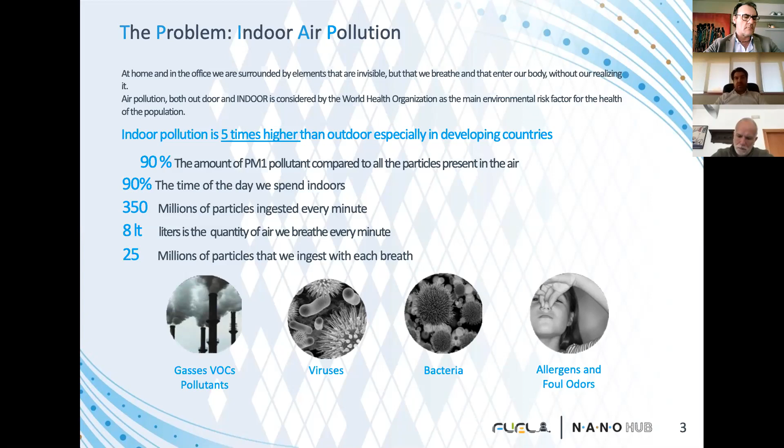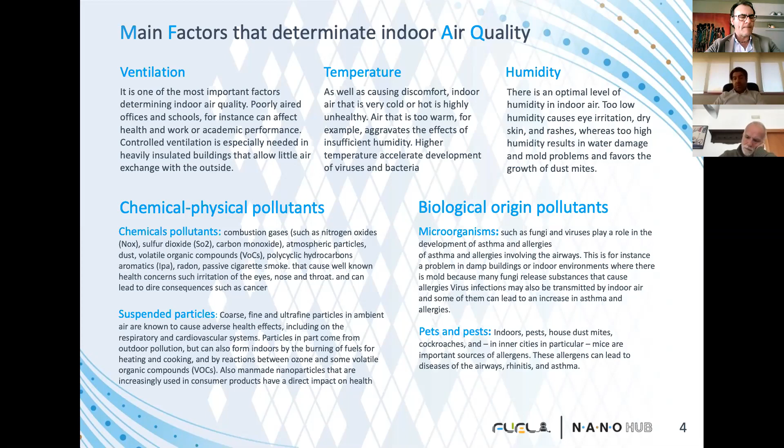Why is the quality of indoor air poorer than outside? Because of poor ventilation systems, because of temperature and humidity creating colonies of bacteria and viruses, and because of the presence of chemical substances called VOCs, like toluene, acetaldehyde, formaldehyde, as well as virus and bacteria present in the environment. So we really have to take care about indoor quality.

I mentioned that last year, when we faced the issue of sanitizing the air inside vehicles—bus, train, tram, airplane, or cruise boat—we tried to analyze all the different technologies available, which today we're learning more about due to the pandemic. But we discarded all of them because we had in mind two main parameters.

The first was the possibility to work continuously, 24 hours, with people inside the vehicle. The second was finding a solution that, considering the life cycle cost—not just the cost of the single product, but the entire life including maintenance, refills, and everything—could keep costs at a decent level. This is a typical approach for train producers: when designing interiors for the train business, we must consider not just the cost of the product, but the life of the train itself.

And following those two parameters, most of the technologies were not suitable. If you're thinking about ozone, peroxide, or UVC light, they are not suitable with people present. We cannot use them while people are inside a vehicle or environment because they are toxic for us. In some cases, like UVC, they can create huge cancer-related damage to our skin and eyes.

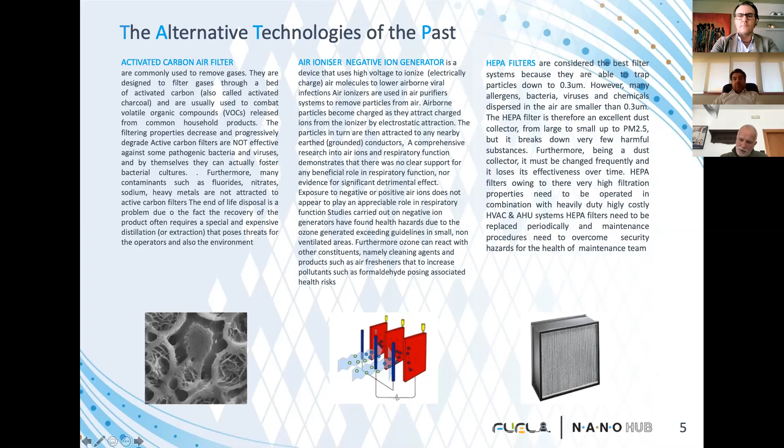Please feel free to interrupt me if something is not clear, or if you have any kind of question from that point of view. Is it okay till now? My side is perfect. Okay. Very clear. Thanks. Yeah, I think we have some questions, but we'll probably save those till the end.

Okay, thanks. Then, for all these reasons, as I said, we didn't consider these technologies already 2 years ago. And we landed on photocatalytic technology because we found out that it was fulfilling the two parameters that I mentioned: able to work 24 hours with the people in the environment, with a total life cost lower than any other type of technology. But speaking about photocatalytic, here again another world opens, in the sense that thanks to NanoHub, we found out that a possibility was to use the trioxide of tungsten, the photocatalytic coating that we use, instead of the most traditional TiO2, dioxide of titanium, that you find also in several competitors' products.

Photocatalytic technology is well known, in the sense that it's not just an invention of today because of the pandemic. It's been on the market for over 20, 30 years. There are rumors that it was also used by NASA for the space shuttle, but in that case it was mainly used to decontaminate the environment. But anyhow, it means that it's a proven and well-known technology. But I repeat, till 3-4 years ago, the only catalytic element that was used was TiO2.

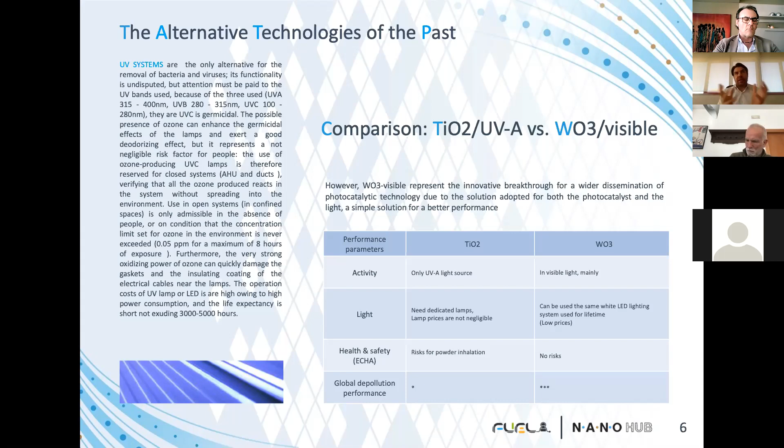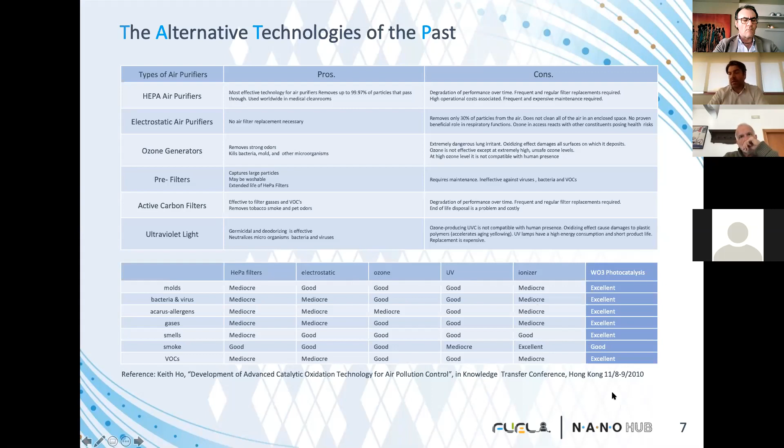Just concerning smoke, ionizers are considered better than photocatalytic, and this is also known. But for all the others, as you can see, in some cases there is not even a comparison with HEPA filters, electrostatic filtration, ozone, UV, and ionizers. And I repeat, it's not my comment, it's a study done already in 2010.

How it works, just briefly. We are saying that it's like photosynthesis.

This meeting has been a great, okay, sorry, I received a message.

How it works is a natural process. Energy, which in our case is light, is reaching a surface coated with tungsten trioxide that in 1 billionth of a second becomes excited and is creating electrons and a negative valence area. It is creating, let me say, an area of about 2 millimeters where it is accelerating the oxidation process already present in the environment.

So it's just an accelerator of the oxidation process, and in fact it is producing what are called ROS, free radicals. These are the ones that are attacking and destroying at the molecular level, or if we are speaking about viruses at the protein and RNA level, the pathogens that are present in the fluid.

I'm underlining fluid because the technology is proven to be effective not just in the air, but also and mainly in liquid as well. So we are also making some applications in water treatment to kill the Legionella bacteria, for example.

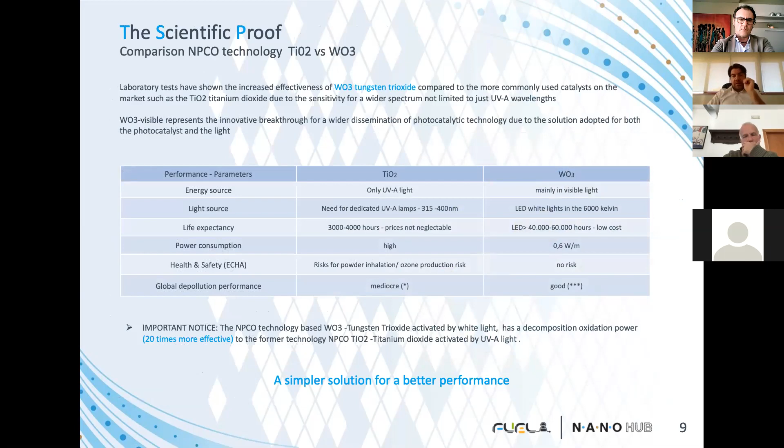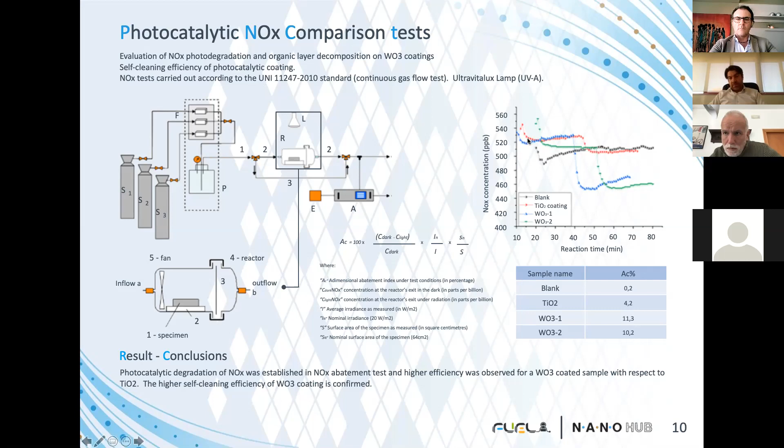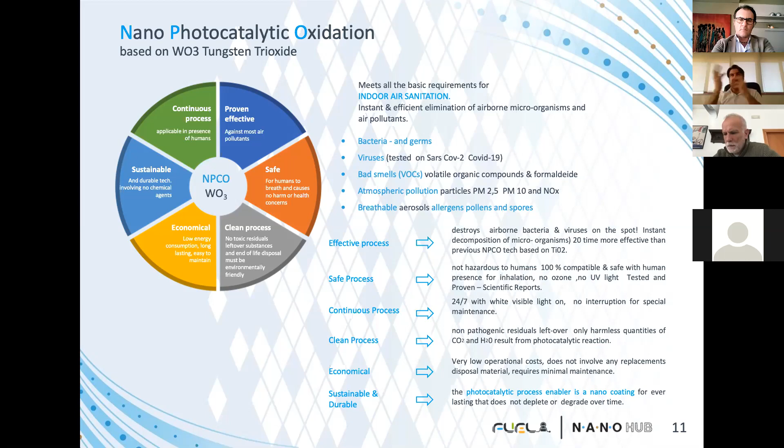But also in the next slide, here is just a commercial, the 6 reasons why we have chosen the photocatalytic in the end. It's proven effective, it's safe, it's a clean process, it's economic, it's sustainable, and it's continuous in the presence of people. And you see here what you already know, that we are the only ones that have really tested the technology specifically on SARS-CoV-2 and not just generically on the coronavirus or on a bacteria with a similar behavior or something like that.

And when we arrived in March, we understood that this was not enough to give a proper answer to the pandemic situation that we were living. And from that understanding, we went on to develop with NanoHub what is now called the KTV filter, the filter that equips all the devices, kill the virus, KTV, and that has been tested at the San Raffaele Hospital before summer, specifically on SARS-CoV-2, and it has been proven that within 10 minutes, 98.2% of the virus was deactivated, and it was 100% deactivated within 30 minutes.

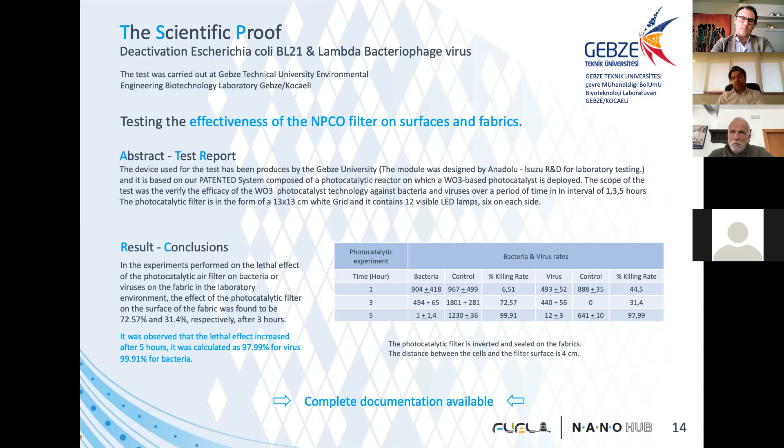Till now I have spoken about health issues related to the virus and COVID-19. But since we started before the pandemic, we were looking at the quality of the air in general. And in this specific slide, you see a study that has been done here in Varese with the University of Insubria by a professor, Mr. Macchi, who is also the president of the rhinologists in Italy.

What they analyzed was the health of the drivers. Why drivers? Because drivers are the people that are passing most of their day inside a vehicle in a traffic jam. So they are breathing pollution, and they are breathing poor quality air, because it's recycled continuously by the ventilation system.

When we are speaking about drivers, we are speaking about people that are passing more than 40–50% of their time inside a vehicle. So it can be a taxi driver, a policeman, commercial agents. So people that are almost living in the car. Breathing this low quality air, they are subject to inflammation of the cells of the nose that are at the end responsible for rhinitis, for the allergic situation.

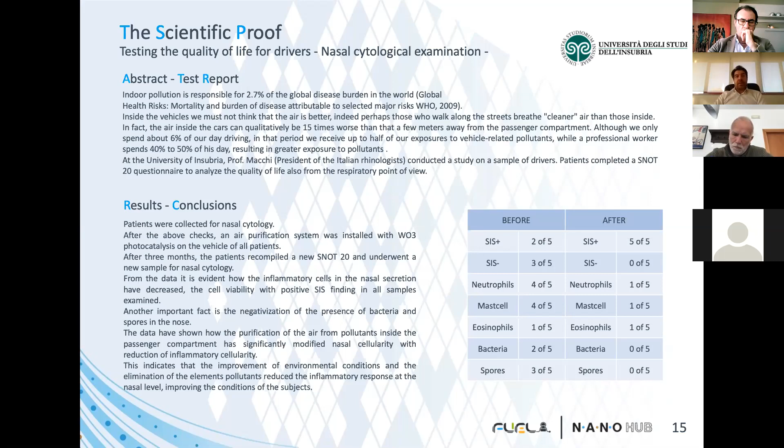Going to another field, not health in this case, but business, we just finished some tests proving that the technology is effective against ethylene. Ethylene is a natural element, not dangerous for us, produced by fruit and vegetables, and it is responsible for the aging of fruit and vegetables. And this is a big issue for supermarkets, for fruit and vegetable storage, because for them it's a nightmare when the fruit and vegetables

become old. So the technology is simply killing the ethylene, and is able to let fruit and vegetables, for example a kiwi, survive for 2 more weeks at 18 degrees. So it means not just that the fruit lives longer, but also that you can use a higher temperature, so you will consume less energy. Normally a frigo cell works at 4 degrees Celsius, so you can increase the temperature, consuming less.

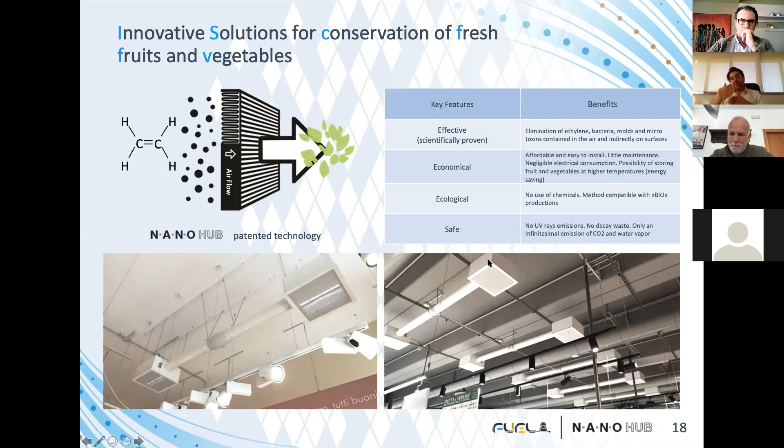How it works: you see a real installation done in a chain in Italy called Famila, but we have also done it in NaturaSì, and we are doing it now at the Gigante chain. On one side, this cube on the roof of the supermarket is sucking the air, sanitizing it from ethylene, passing it through the pipe where there is a fan, and injecting it again into the environment without the ethylene. You can understand how fast the ROI, the return on investment, can be using this technology in this kind of situation.

In March, as Ellamp per Fuel, we were at a crossroads. Our traditional business was suffering a lot in volumes, production, from the buses and train point of view. But we decided to put our expertise on the table, designing and producing for NanoHub this range of 12 products that today are in fact 13, and there is a new one now in prototyping for elevators that is coming soon. All of them are based on the KTV filter, so all of them have the same effectiveness that I just tried to explain.

And the main differences are related to where to use them and the functions that each of them has. You also find here on the bottom right another logo beside the CE certification for electromagnetic and electric risk that we have for all the devices. This is also SIMA verified. SIMA is the Società Italiana di Medicina Ambientale.

This is the Italian Association for the Medical Environment, a no-profit organization recognized by world organizations and institutions. They checked with San Raffaele the effectiveness of our technology and gave us this certification as SIMA verified.

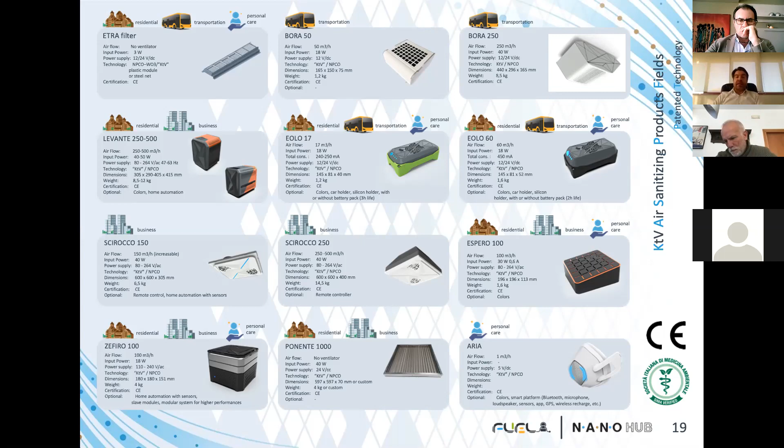Sorry - no, I can explain thanks to this slide, sorry.

This is the ETRA, the one for the bus. This is the air grid - you open it, you fit our filter, and you close it, and you won't see anything. In the scope of supply, there is the filter coated with tungsten trioxide, an aluminum frame used to fix the filter to the body of the bus, and LED strips. There is also what is written here as a dust filter.

When speaking about the dust filter, think of the dust filter in your kitchen, the one above the oven. It's simply recommended to keep the surface of the photocatalytic filter clean from dust. It's not part of the sanitizing process - it's not killing viruses, it's not filtering VOCs. It's simply blocking the dust.

In the bus, for example, this is a normal component already inside the air grid. Why? Because I told you it's a coating, a surface coating that we put on the filter, and the light energy has to reach the surface. So if the surface is completely covered by dust, the process will not be activated. That's simply why it's needed.

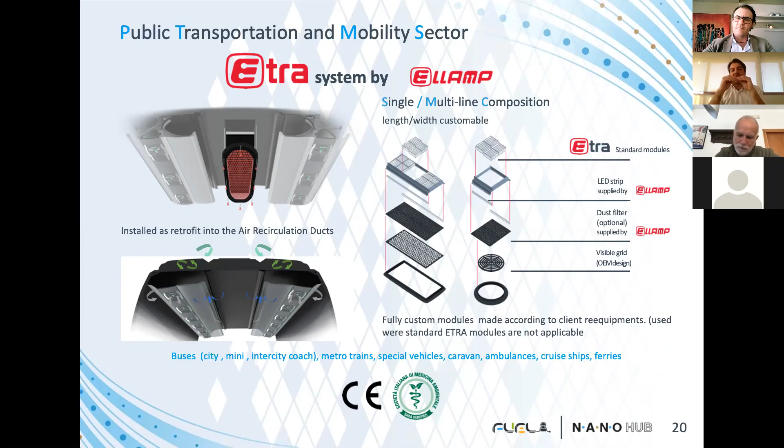So using photocatalytic coating, you will not see this kind of issue anymore. So when I'm speaking about having to clean the filter, take also into consideration that at the end it's also a self-cleaning surface.

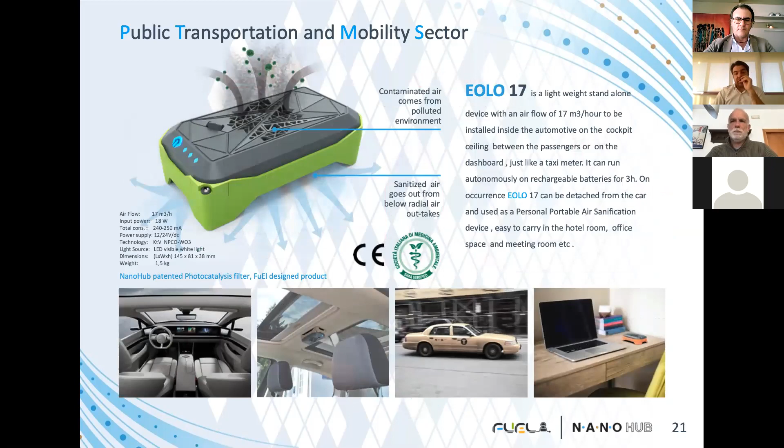This is another product, the Eolo. Eolo 17 and Eolo 60 are at the end part of the same family. Compared to the Bora 50 that I mentioned, the dimension of these components is 7 centimeters per 14 centimeters, with a height of 50.

The difference is that this one is equipped with a battery pack that allows you to use the device also when it's not connected to power. So while you are inside a taxi, a car, a van, an ambulance, a driver cab, it will be connected to electricity, 24 or 12 volts. But then when you stop your car, you can bring it with you to your hotel room, onto your desk, you can carry it with you like a gadget.

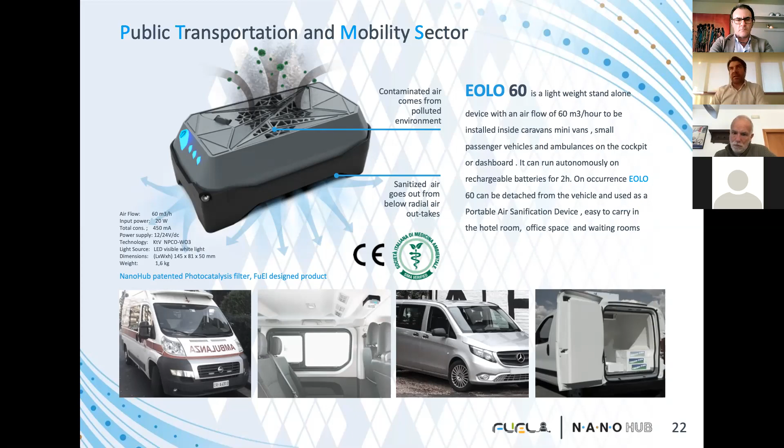It also has control of the speed of the fan, something that the Bora 50 does not have, and it's made out of metal. The case is metal, so it's suitable mainly for fleets. So you have a fleet of buses, you want to keep the device inside the buses without worrying it will be damaged, so this kind of device is more suitable, and that is that one.

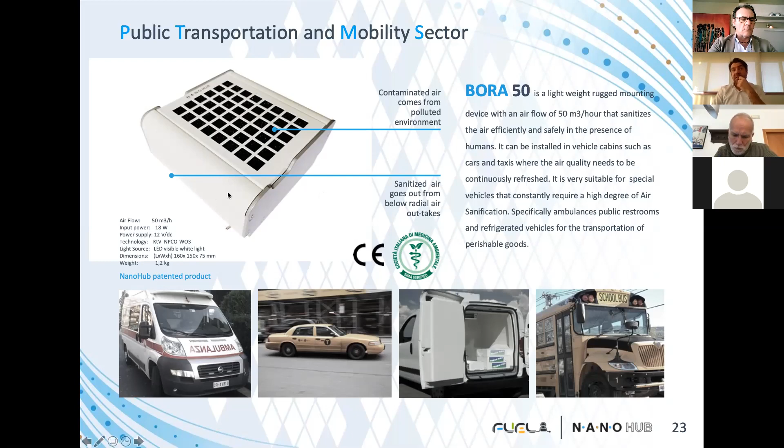So you see at the end it has the same power, 50 cubic meters, but is stronger from the elements point of view, and is also bigger, 16 centimeters. Bora 250, I was mentioning, is for the bus where we don't want to integrate it into the air conditioning system.

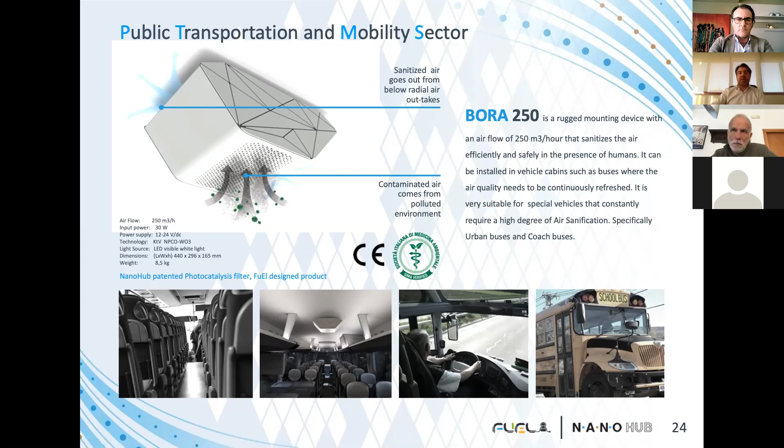It just has control of the speed, you can switch on and off and change the speed of the fan, but has no other features. Something different from the Zephyr 100, which is not yet in production, but we hope to be able to release it before the end of the year, beginning of 2021.

Second, it can be equipped with sensors to measure air quality - at least VOC, PM2.5, PM10, CO2, humidity, temperature, and formaldehyde - and it will self-control the device's fan speed. So it will check the quality and adjust itself.

Last but not least, these gray, silver layers - each of them is a photocatalytic filter, KTV. Why that? Because photocatalytic technology is effective under two main conditions: how big the device is from the power point of view, cubic meters per hour - meaning how many times I'm recycling the air inside the environment - or related to the surface of the filter.

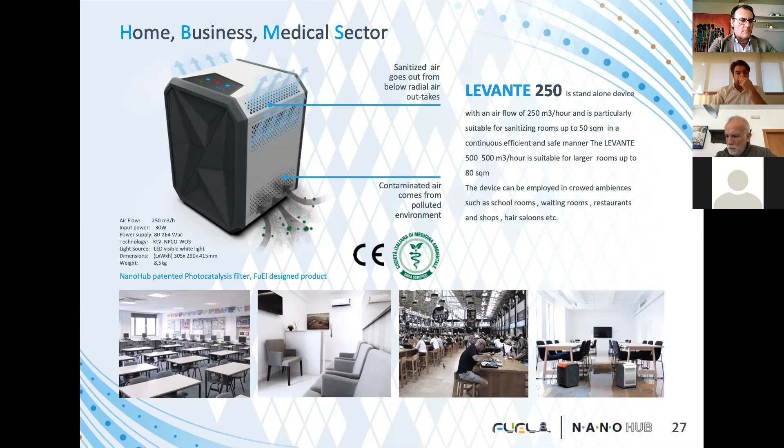What else? So we have the Scirocco, designed for roof application. It normally fits in the fake roof panels in offices, 60 by 60 centimeters in dimension. You take out one of the existing panels and fit one of ours, with a remote control. It sucks the air from one side, sanitizes it in the back, and releases sanitized air into the environment. So it's not a standalone device like the Levante, but it's also not just hanging around—it's integrated into your roof.

In the next generation, it will also be possible to use a sensor we are producing that will self-control the Scirocco 150 automatically.

The Scirocco 250 is used for IT LAN applications and for supermarkets, fruit and vegetable areas. As you saw in the picture I showed you before, it has two filters on top, with two big boxes and a pipe with the fan. In fact, the Scirocco 250 can reach up to 500 cubic meters per hour because the engine is able to reach this power, but it depends on the noise level you want and need inside the environment.

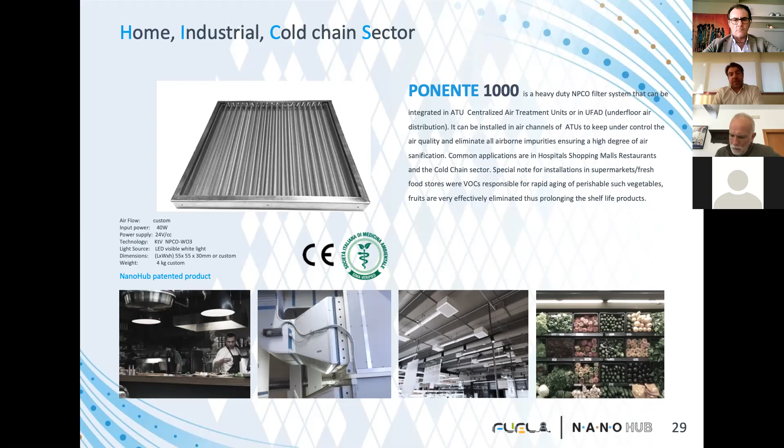As I told you, we are also releasing a device for elevators. So in the next couple of weeks, we will have the prototype and we will update the presentation. But now the last one is this air mask, the mask that is called Aria, air in Italian. And it's based, again, on a photocatalytic technology. It's not a mechanical mask like the one that we are normally using. So it means that you have no mechanical filtration, it's a chemical filtration. So the feeling when you're breathing is much smoother than what we have today with just surgical masks.

It is equipped with batteries able to reach up to 8 hours life, rechargeable with micro USB. So it means that you can also use a battery pack. There is also inside, in the standard version, the basic version, a small fan activated on demand that is able to evacuate the CO2 that we are producing with our breath. So it is helping to avoid what is called hypercapnia. That is the disease typical of divers when they are going to diving sessions.

But it was also, in some cases at the beginning of the pandemic, related to people that were using for a long time surgical or FFP2, FFP3 masks, because they were breathing their CO2. And when you're reaching a level higher than the normal atmospheric level of CO2, you are at risk to get hypercapnia.

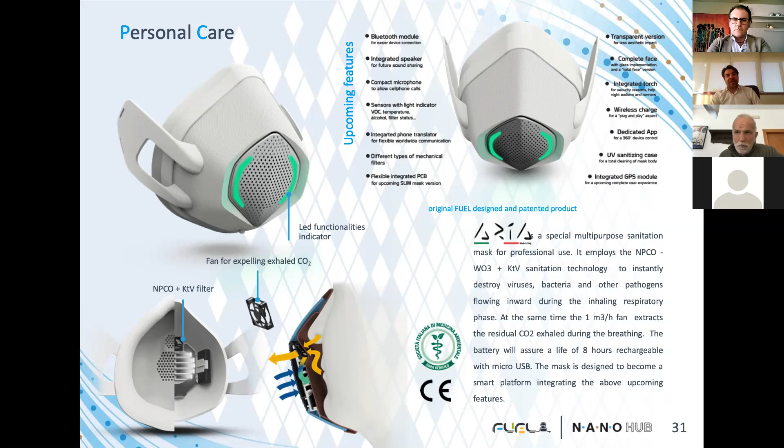So I finished with the long presentation and story, so sorry if it took a long time, but I hope that it was useful for you to understand better the technology. Just to let you know, for each device that I briefly presented, there is a specific presentation where there is a brief resume again of the technology, plus some more details and installation renderings of the different components and other specific information. For the Levante, for example, you will see in the presentation also the brackets to fix the device to the wall, or the pedestal to keep it from the ground at a certain height.

Because one of the suggestions is to not put the device on the ground, because it will suck just the dust from the ground, and it will not be able to let the air flow in the proper way. Better is to put the device more or less at 1.2 meters. Why? Because it's the height where normally our mouth is, and since it's the mouth that is releasing the virus, bacteria, pathogens, it is the best place to filter the air in the proper way. But all this information is inside the specific presentation, like we have for all the tests that I briefly described, the full scientific research.

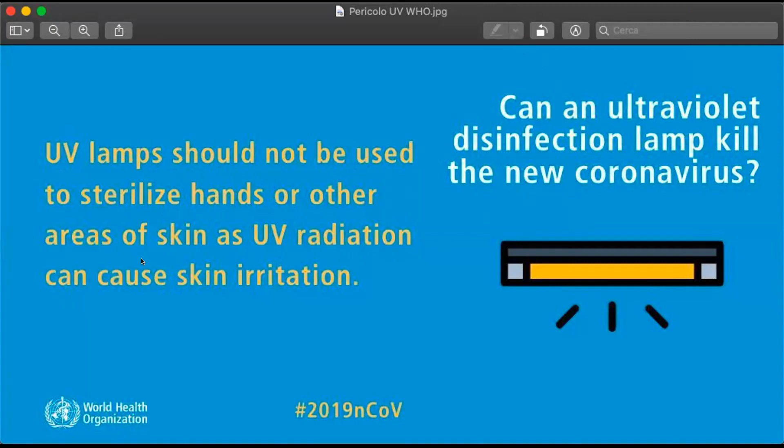Okay, first of all, I'll show you something that was released during the pandemic by the World Health Organization. As you can clearly see, the question was, can an ultraviolet disinfection lamp be the answer for the coronavirus? And the answer was UV lamps should not be used to sterilize hands or other areas of skin, as UV radiation can cause skin irritation.

So, as I said before, the use of UV became popular again because it's true that it is effective against the virus, but there are so many counterindications and disadvantages that should not give competitors the chance to say they are better than us. It works. I'm not saying it doesn't work, but I repeat, there's the risk for the skin using UVC, because if we use UVA and UVB, we are not effective at sanitizing. Otherwise it would be enough to go out under the sun. It's different if we are speaking of UVA and UVB in the photocatalytic technology.

But remaining on UVC: it is dangerous for the skin, it is a high energy consuming technology, a high cost technology because of the maintenance, and not a green technology because of the recycling of the UV lamps and LEDs. And there are several researchers, I can give you, showing that if you do not correctly control the frequency of the UV, because UV is not just one frequency, it works in a range starting from 180 up to 400 nanometers.

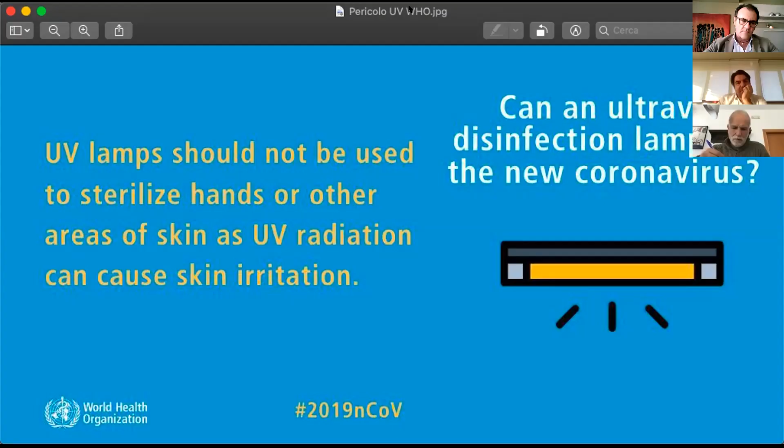But yeah, we have people that have big fans with big lights in a box, and they're cheap, and they show laboratory reports that UVC kills the virus. So people don't understand anymore. Now we're learning they're high cost to run. The lamps contain mercury. It's not an environmentally friendly or sustainable solution. So now we have weapons to start to talk against those kinds of products.

So this has been, I think, a very useful call, but for sure we will have more questions in the future. Yeah. So what I would say is maybe if anyone else in the Tempest team has some specific questions they want to raise.

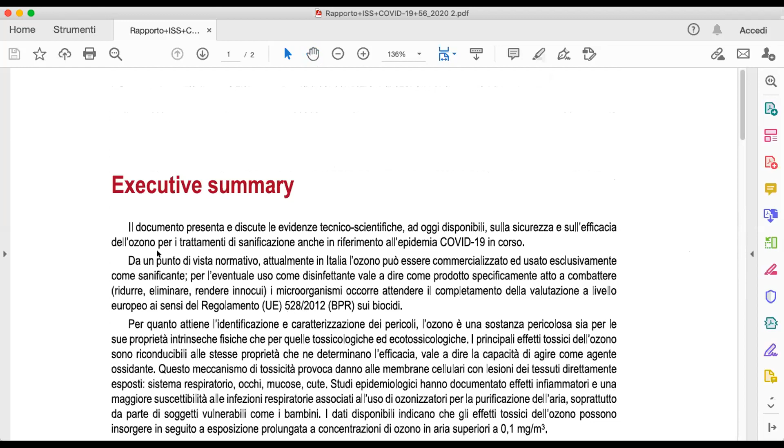Meanwhile, you can see, I know that it is in Italian, sorry, this is the official paper of the National Institute of Health in Italy. It was the regulation released during this pandemic, and it referred to ozone, okay? So this was just the summary. And clearly they said that, for what concerns specifically the effectiveness against SARS-CoV-2, the sanitizing effect is in principle feasible, considering all the mechanisms that are used by ozone.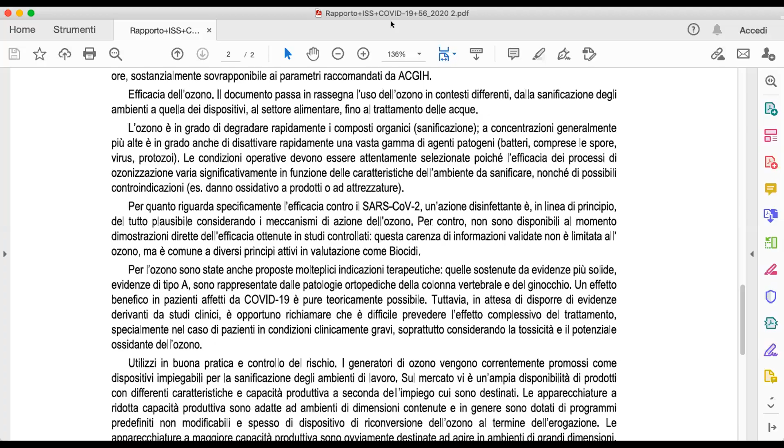But on the other side, there is no direct demonstration available at the moment that it is effective against the virus. Okay, so this is saying that this lack of information, of proven tests, is not just limited to ozone, but is common to several biocides that are normally used. So when I was saying that we are the only one that has been tested against SARS-CoV-2, that should at the end be the answer for all the questions or remarks. The ones using ozone, peroxide, HEPA filters, ionizers, plasma, electrostatic filtration, none of them, at least to our knowledge, has really been tested on SARS-CoV-2.

There is, for example, I don't know if you have seen it, I can send you the link, a UV lamp working at 222 nanometers that has been patented recently and tested in a Rome military research center. That is a frequency that is not dangerous for people, at least that is what is declared, but it is anyhow low frequency, theoretically able to kill the virus. And they performed the test, saying it was effective and not dangerous. But when you read the test, you will see that it was performed at 20 centimeters from the light source, and it was 20 watts per every 100 square centimeters. So an area of 10 by 10 centimeters at a distance of 20 centimeters from the source.

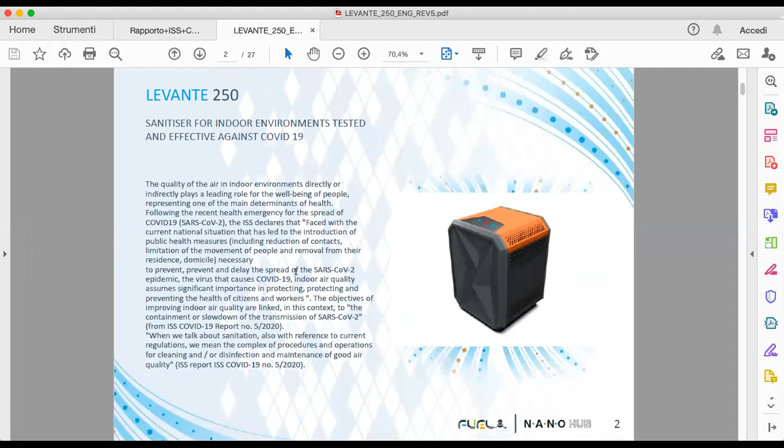Okay. This is the product presentation of the Levante 250. So there is again the quality of the air, the sanitizing problem and technology, the comparison with the different technologies, the test, and then there will be some specific information about the device, how it looks. All our products have a family feeling. These triangle shapes you will find in all our products, to try to be recognized. Okay, that's great. Yeah, thanks. Thank you.

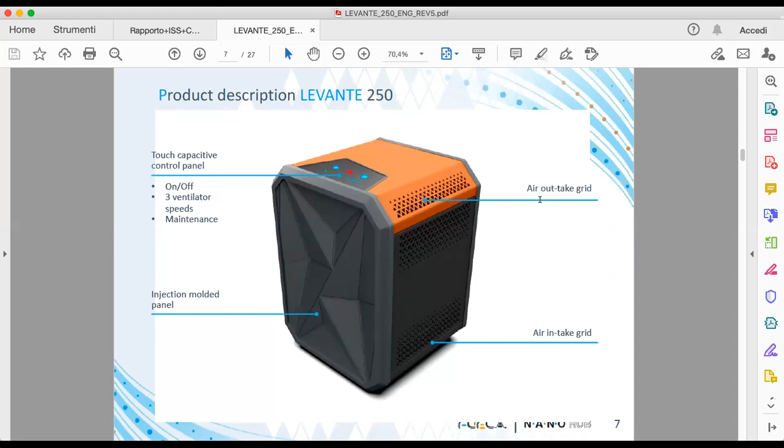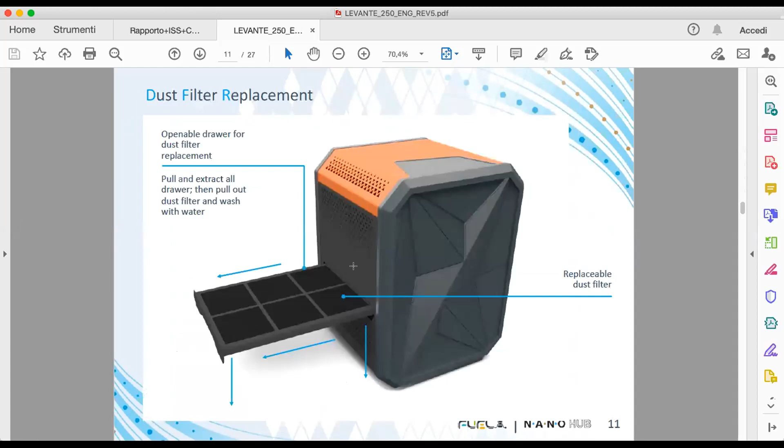How it works, the intake, outtake, the control panel, the dust filter, the dimensions - an exploded view to let you understand what is inside, how it works, the dust filter, and how to replace components inside. All this information arrives with the accessories, as I mentioned, like the brackets to keep it on the wall.

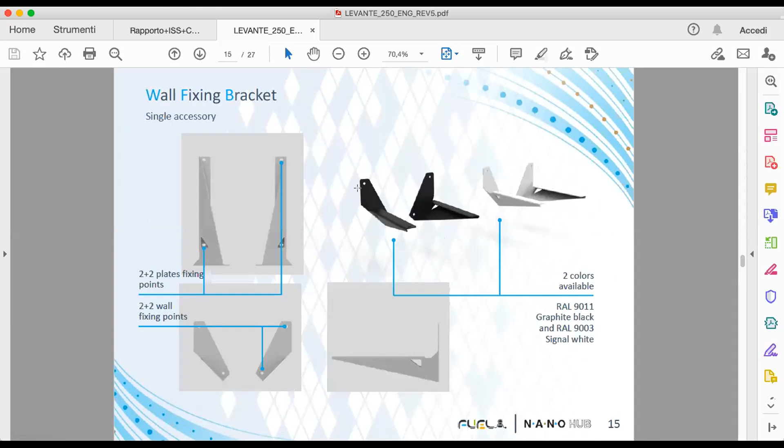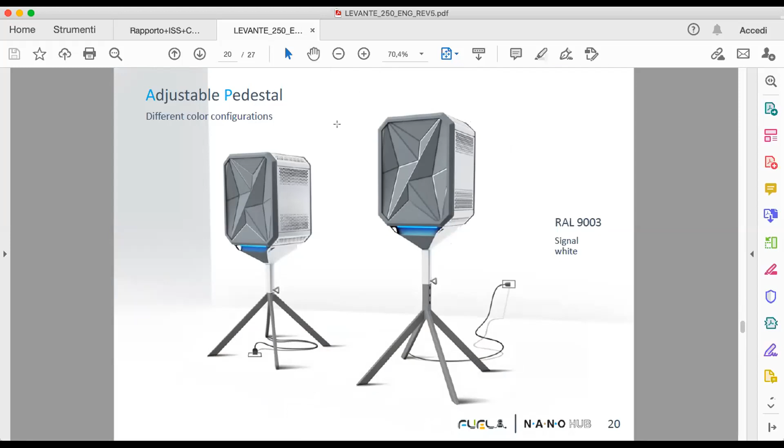There is the pedestal, and there are also options in colors. At the moment, the Levante, for example, is supplied in 3 colors: total black, gray, and white from the side point of view, and black and orange.

These are then the environments.

Just one other question - is there some sort of clean down routine for these units in case they are being prepared for a COVID environment? If imagine they're installed in an area which is regularly going to be exposed to COVID and they're switched off, is there a clean down procedure?

No, in the manual there are the products recommended to clean without damaging the device, especially from the plastic and painting point of view. There are no specific indications for COVID, because in that case it's simply like the other recommendations we have for every surface. There is nothing specific, at least.

That's brilliant, thank you very much. I don't have anything else.

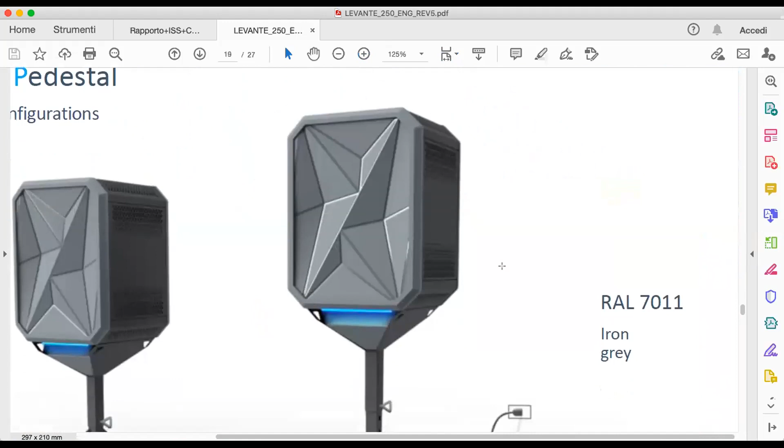As you have seen, probably I can show you again in the picture - from the drawer point of view, it's something typical that we already fulfill in the automotive industry. The drawer is on the side, and as you can see from the picture, there is a hole in order to avoid your fingers being damaged while opening or closing it. There is a specific area where even if you put your hands inside, they will not be cut or otherwise harmed. And when you open the drawer part, the device automatically switches off to avoid, even at low tension, any damage if someone puts their hand inside.

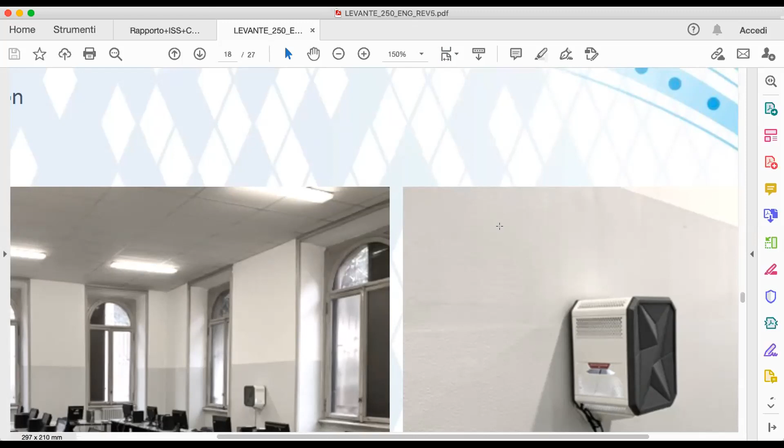That's a great picture, actually, because this would be one of my questions - where do you actually install the devices? According to my understanding, the best and most efficient way is to install it somewhere in the middle of the room, but now I see this wall mounting option. Was it approved by the Italian government for schools like this? Yes, this is public, it's not even private - this is a public school in Italy.

Okay, so it was approved. But let me show you also - as I was saying, we are able to make airflow analysis. I can show you a very short video about the activity that has been done specifically on the school to understand where to put the device. One second, I will switch the picture to the video.

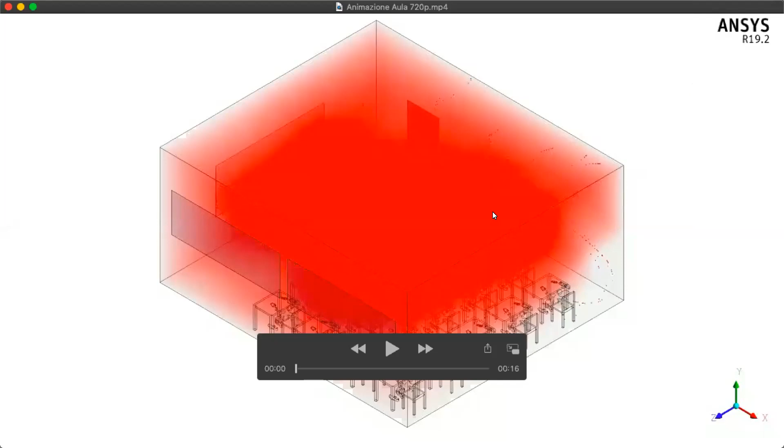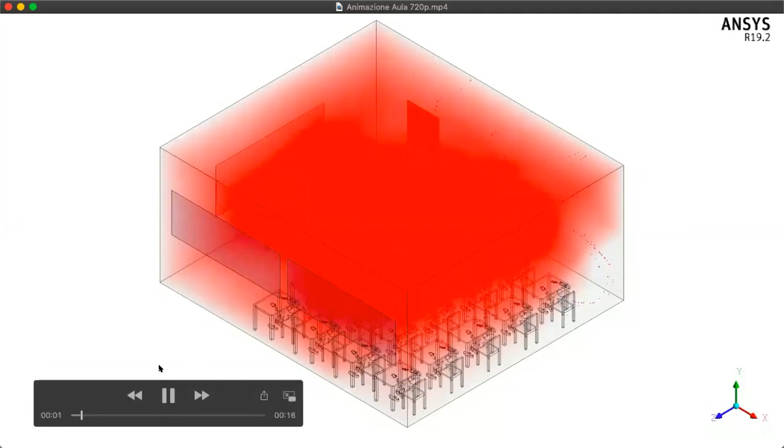Okay, can you see my screen? Yes. This is a school with 20 students inside. The red simulates the saturation of the environment due to pollution or pollutants, contaminated area due to our breath. In the video, the Levante is located like in the picture you've seen, and you can see how it works - the airflow filtering the air inside the environment.

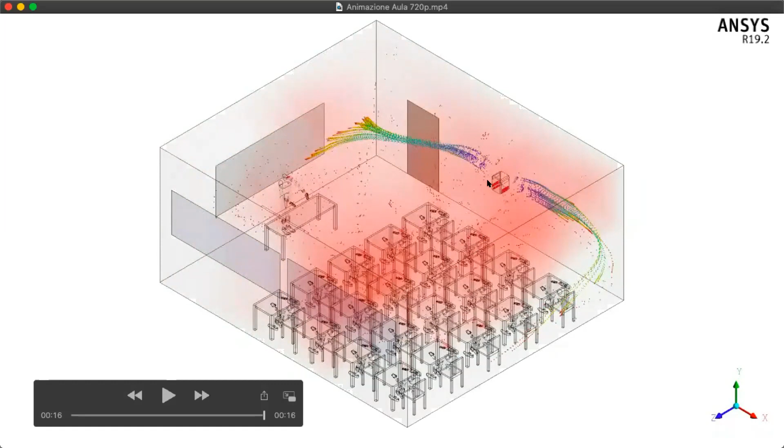We also tested putting the device on the ground or in the corner, and the effectiveness was completely different because of the less optimal airflow performance in the environment. So we are able to make this kind of simulation as well.

For example, we are supplying Mercedes the system for the bus toilet. We are a proven supplier to Mercedes for toilets with sanitizing - we're also discussing the bus application, but the toilet solution has already been proven. We also did the airflow simulation in that case to understand how the system would work inside the toilet, because we must not forget it's also effective against bad smells - not just COVID or VOCs, but bad smells too. So it's useful in this kind of situation as well.

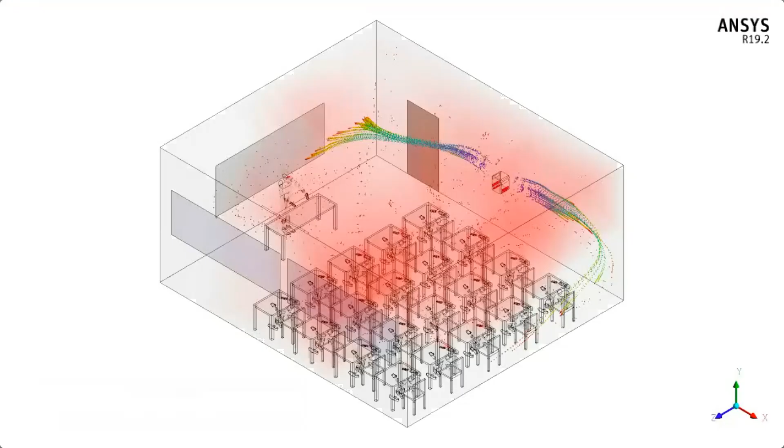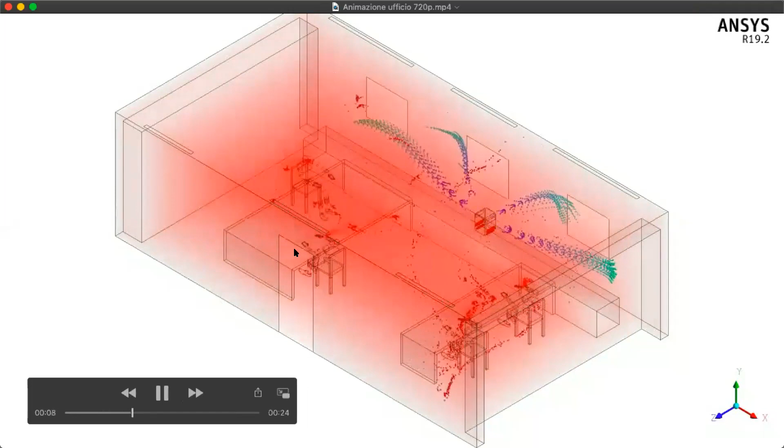We did also the similar simulation in an office with 4 people inside. Let me show you that again. Red saturation, and you see that the device at 1 meter from the ground is cleaning, with the airflow inside the office with the 4 people.

Speaking about quality of the air, you will find a lot of devices that apparently are cheaper, or that declare they are useful for environments of, I don't know, 40 square meters. Then you go into the details and you see that they have a fan of about 20 or 30 cubic meters per hour. It means it will probably take 2-3 hours, but it will never work to sanitize the air.

That's also important, and it's the reason we are making airflow simulations, because devices are not comparable. I strongly believe a good answer to air quality today is connected to 2 systems: mechanical ventilation and sanitizing of the air. Mechanical ventilation, why? Because the faster you're able to recycle the air inside an environment, the more you dilute the pathogens inside that environment.

We did an installation here in Varese at a diagnostic center, and in the area where they're using the TAC machines, they have 48 cycles per hour. Every 1.2 minutes, they are completely changing the air of the room. We're sure that in that area, we don't need any kind of sanitizing.